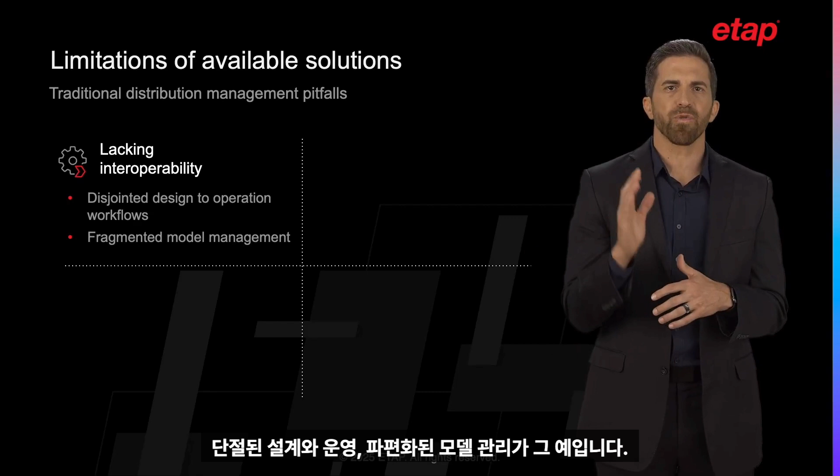As we assess the current ADMS landscape, it's clear that many systems suffer from critical integration challenges, from disjointed design to operation workflows to fragmented model management. These systems are very rudimentary, providing a SCADA, yes, with nice dashboards, but no real meaning. It may provide a high-level voltage optimization approach, but it lacks a connection to planning, and an outage management system that does not include an intelligent or accurate method to detect, isolate, and manage faults.

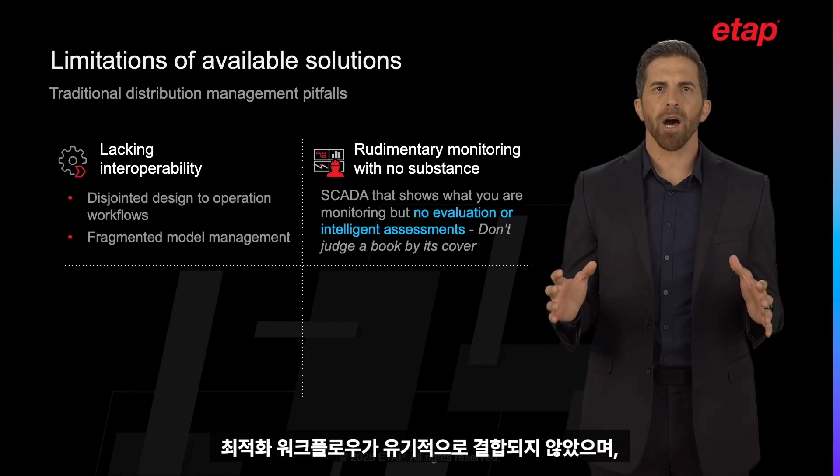The lack of a cohesive SCADA, network planning, protection, distribution management, and optimization workflow, coupled with the absence of microgrid digital twins, which usually requires a completely different product or solution set that has no knowledge of the rest of the distribution system, leaves operations vulnerable and limits the ability to fully optimize distributed resources.

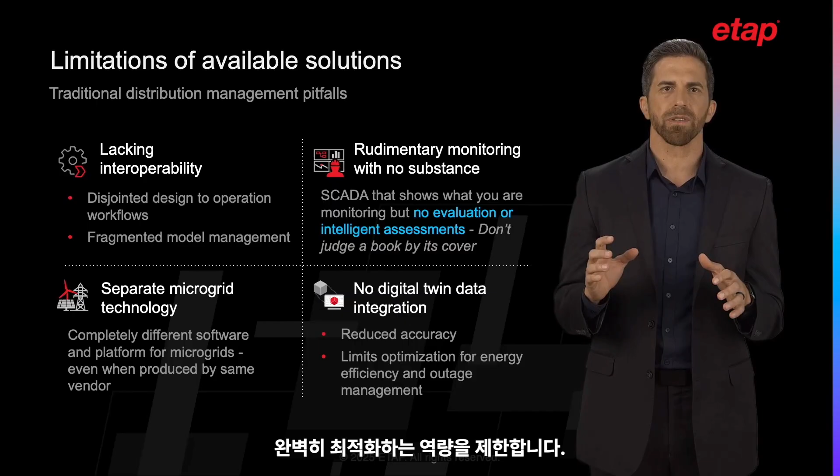Furthermore, there's the inadequate ability to simplify determining regulation compliance, no methods for working in a collaborative environment, and the inability to provide real-world training scenarios for a workforce currently experiencing a shortage in skilled resources. This exacerbates these issues, underscoring the need for a unified, forward-looking solution that can drive both operational resilience and strategic growth.

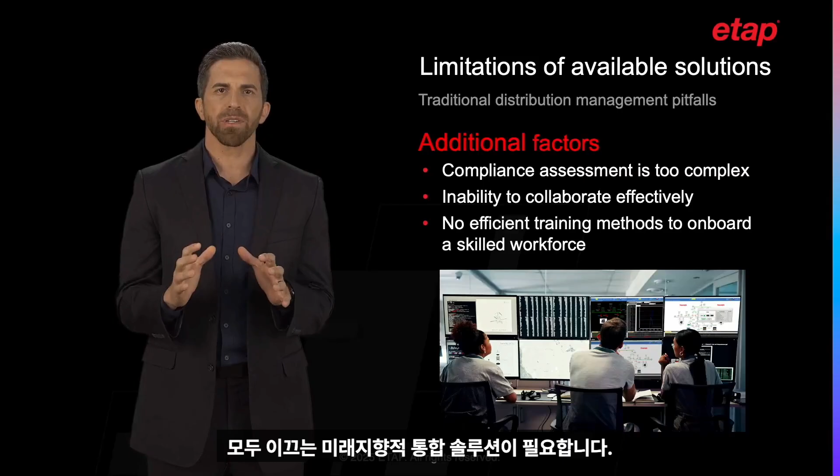ETAP stands apart by offering a truly integrated model-based solution that directly addresses the critical gaps in other ADMS platforms. We deliver a seamless flow from design to operation, ensuring that models are not only maintained, but also fully integrated across all aspects of operational planning. With ETAP, you gain a unified system that brings together protection, planning, operations, optimization, including safety and compliance regulations, all under one comprehensive platform and digital twin model.

This includes details within the feeder network, substations, and connected microgrids to provide the ability for engineers to perform system studies using operational data and for the operators to manage and optimize the system using system design knowledge. Our approach ensures that the entire network is accurately represented, managed, and optimized.

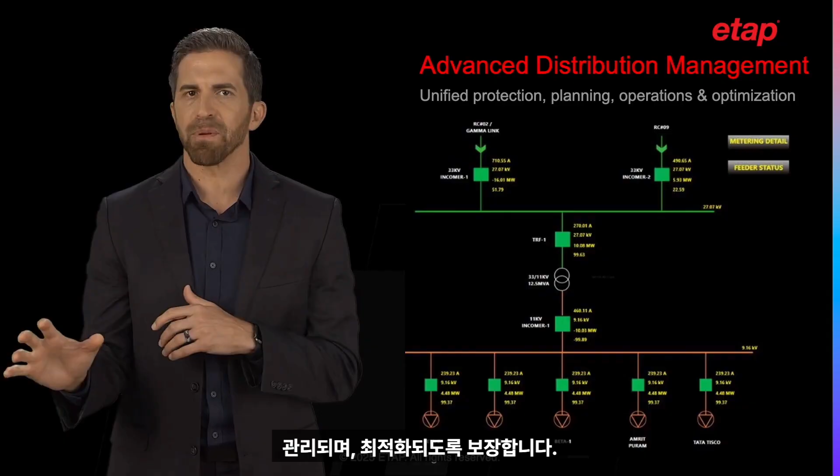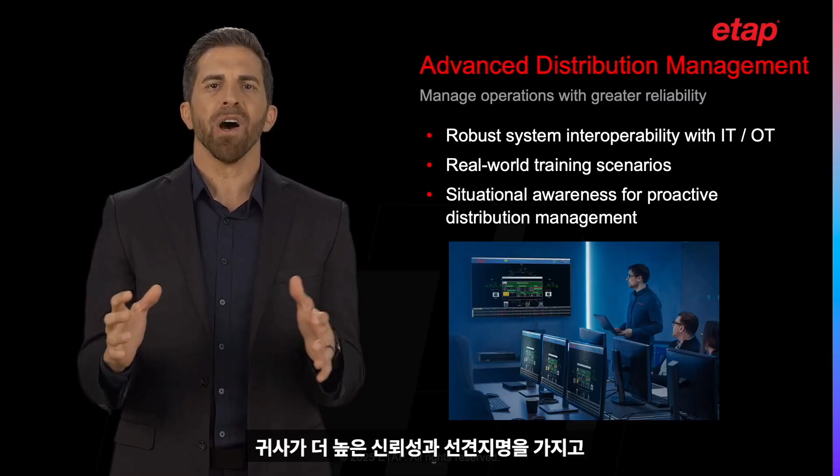We also provide robust support for system interoperability with the IT and OT network, real-world training scenarios to uplift new staff, and situational awareness, empowering your organization to proactively manage operations with greater reliability and foresight. In short, ETAP equips your operations with the advanced capabilities needed to overcome the limitations of traditional systems, driving both efficiency and strategic growth.

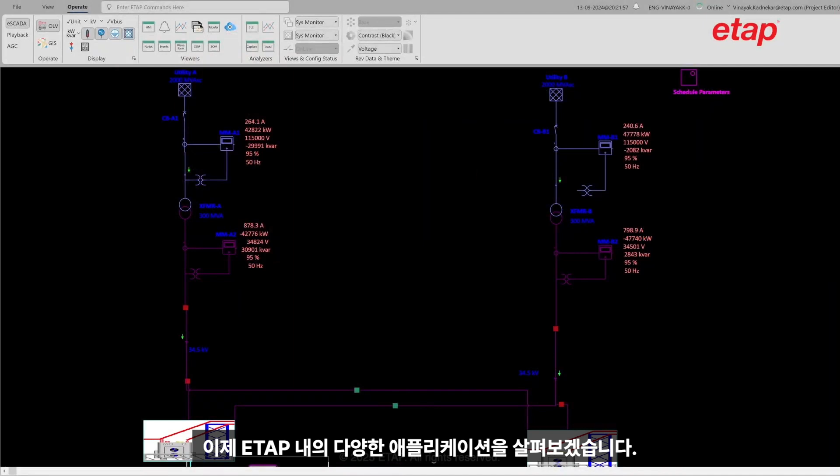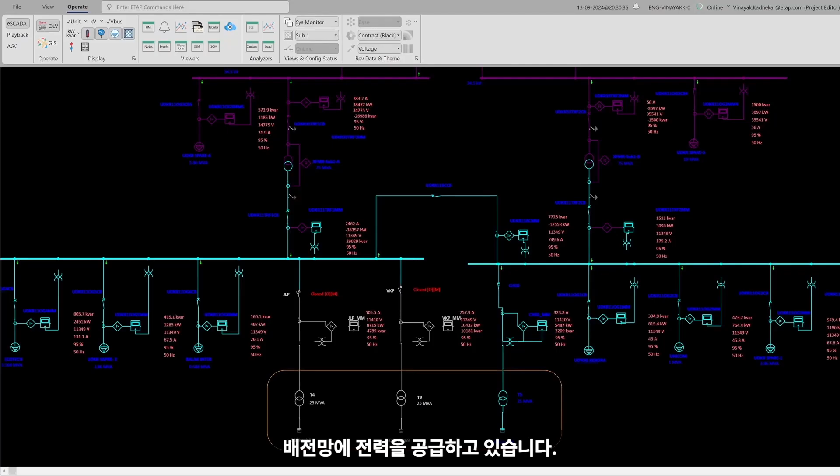Let's take a look into the different applications within ETAP. In this project, we have 115 kV, with transformers bringing it down to 34.5 kV into our distribution substation layer. We have modeled 2 substations, where power is further stepped down to 11 kV for our distribution network. We have 3 feeders, 1 de-energized and 2 energized, feeding into the distribution network. For the other substation, it's simpler, with just 2 feeders feeding into the network.

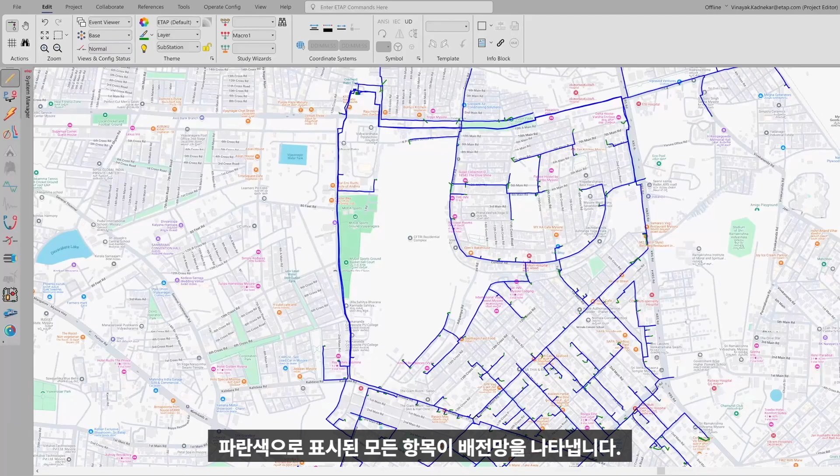Now let's move to our distribution view. Here, you can see our primary distribution network. Everything in blue represents the distribution network. Zooming in, you'll see our 2 substations with feeders extending. We've also modeled our secondary distribution network, including the distribution transformers and end customers, such as commercial and residential buildings.

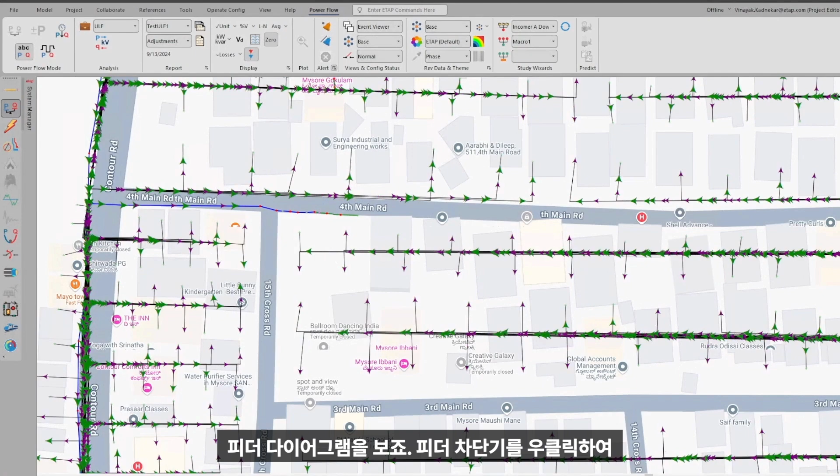Let's take a look at our feeder diagram. By right-clicking on a feeder breaker, we can dynamically create a feeder view. This orthogonal view provides a schematic feeder representation of the network. Various configurations, such as top-to-bottom or bottom-to-top views, can be set in the Rule-Book, offering flexibility in how you visualize your network.

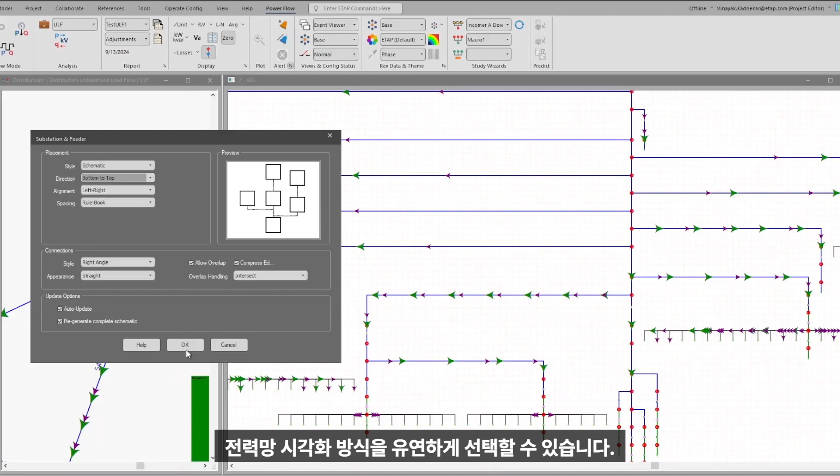Another important visualization is NetView. This view simplifies the network by stripping out unnecessary information, focusing on lines, protective devices, and status interconnections. It provides a powerful automatic way to visualize outages and network interconnectivity.

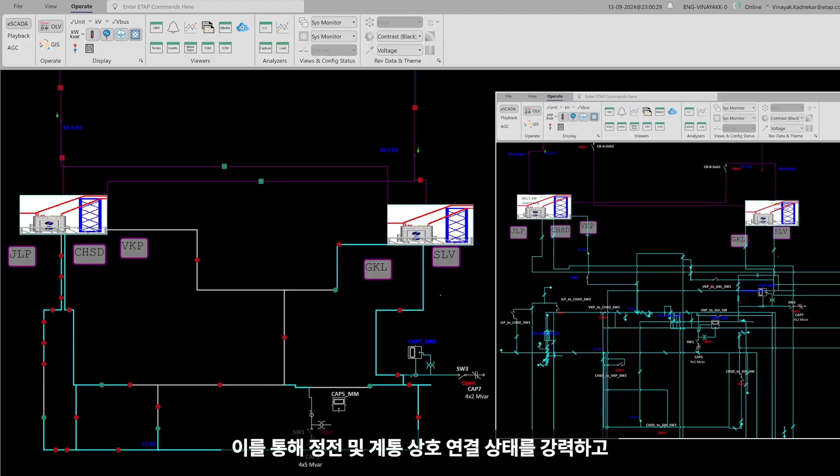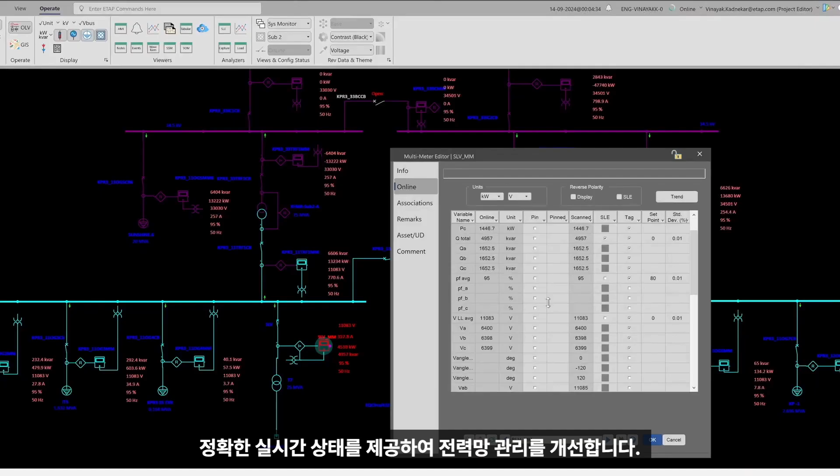Now, let's dive into the real-time portion. Here, I have my actual meter data and virtual metering calculations, showing real-time flows throughout the distribution network. Virtual metering significantly enhances grid management by providing operators with accurate, real-time insights into the electrical state of the system without relying solely on physical meters.

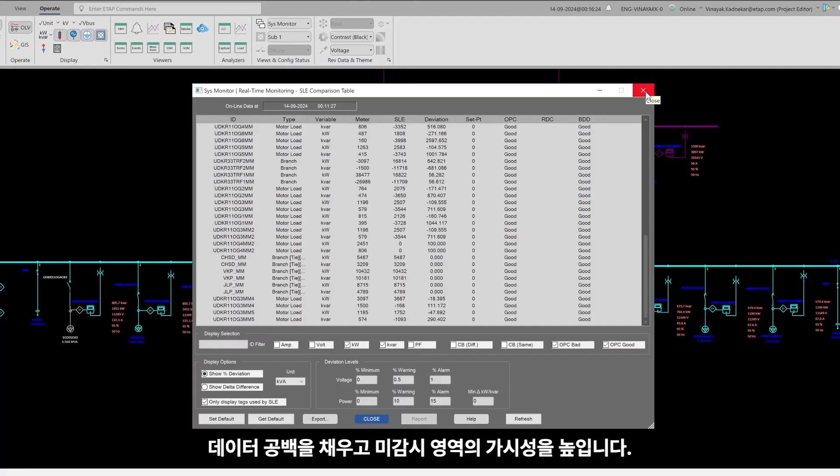Virtual metering is possible by leveraging the digital twin with advanced algorithms to estimate power flow, voltage levels, and load conditions across the grid, filling in data gaps, improving visibility into an otherwise unmonitored area. As a result, operators can make more informed decisions, optimize grid performance, and quickly respond to anomalies, leading to a more efficient, resilient, and reliable power system.

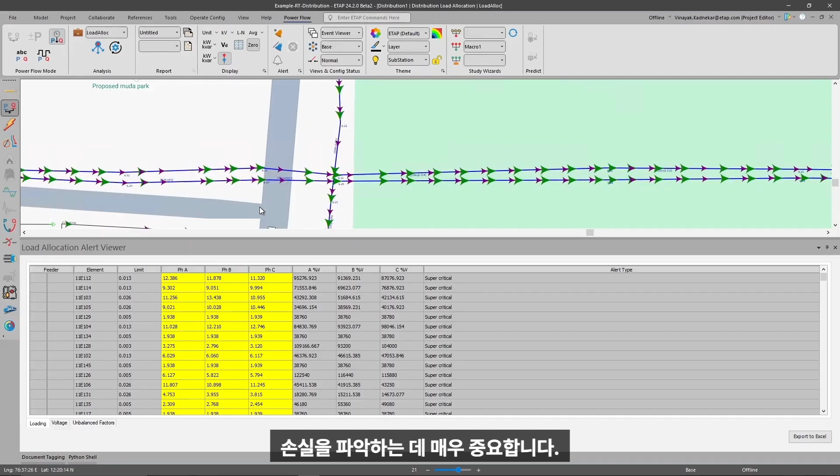Load allocation is also included, and this is crucial for understanding real-time flows and losses across the distribution network. We calculate losses, both due to heat and unaccounted for losses, which can indicate issues like theft. This data feeds into various study modules like unbalanced load flow, time domain load flow, enabling predictive simulations. You can perform what-if scenarios such as transferring loads between feeders to assess potential overloads.

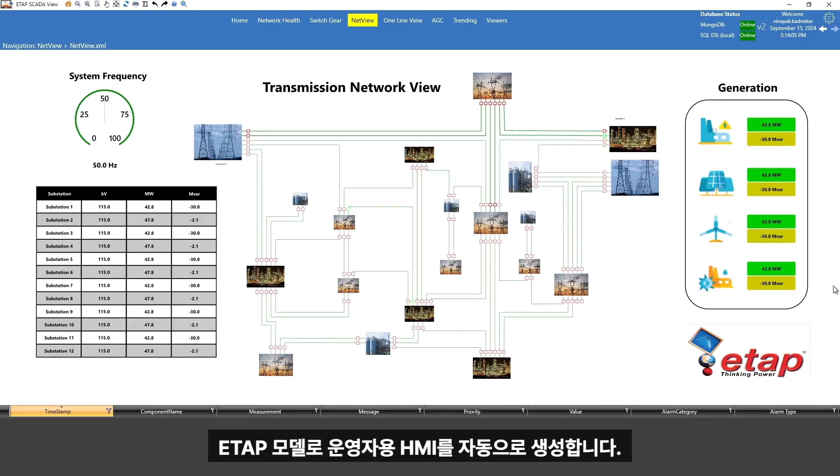Other analysis that can be performed within the same software using the single source of truth digital twin include short circuit, protection and coordination, arc flash for safety compliance, and power quality assessment. With the ETAP model, we can automatically create an HMI for operators. This model is used for analysis and planning and can be pushed out and viewed in our HMI viewer.

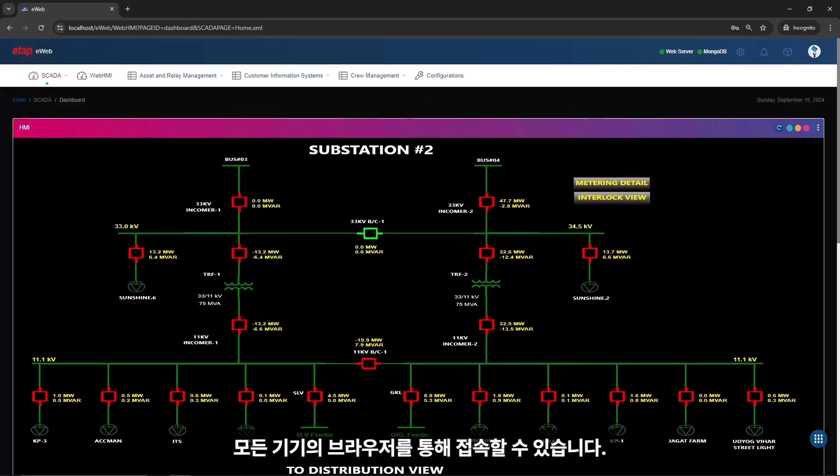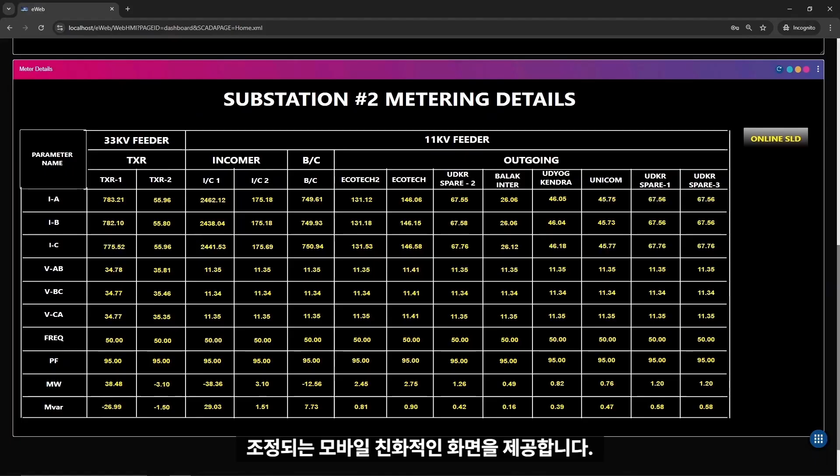eWeb is our web-based user interface, offering the same HMIs, but accessible via a browser on any device. eWeb requires no installation, providing mobile-friendly views that adjust to various form factors. We've significantly expanded eWeb to include advanced visualizations, such as substation panel views with real-time data and network views showing all interconnections. With the intelligence of the digital twin driving the graphics, the distribution network and substation visuals are automatically updated based on the status and operations of each device. This is without the typical manual manipulation of antiquated ADMS systems.

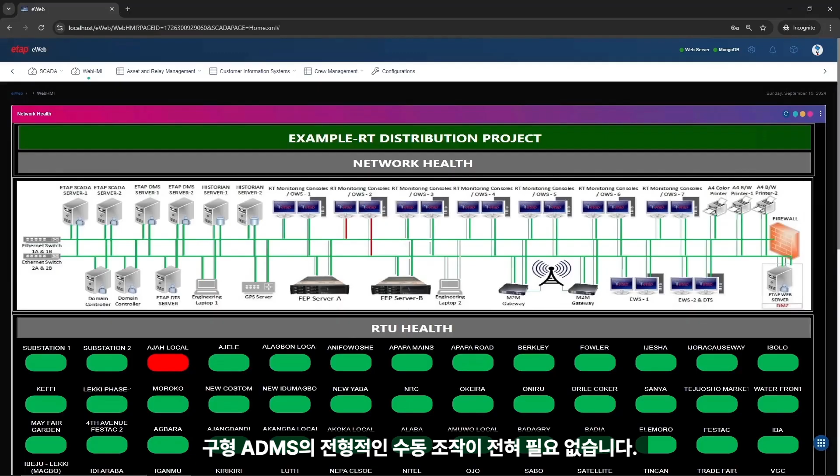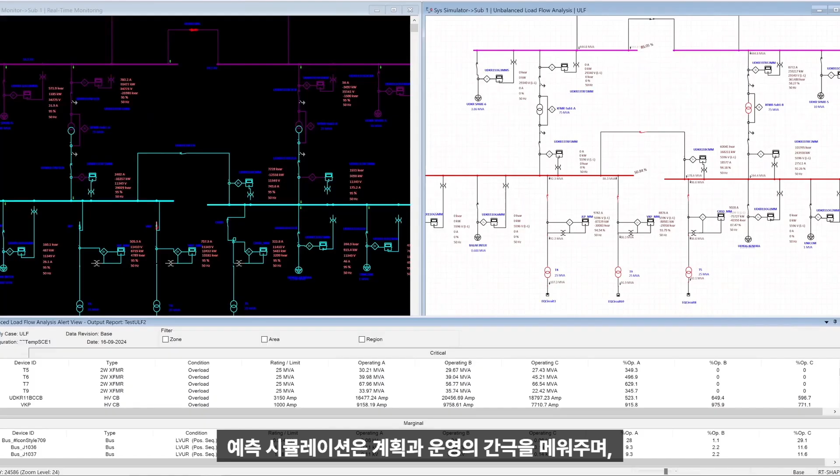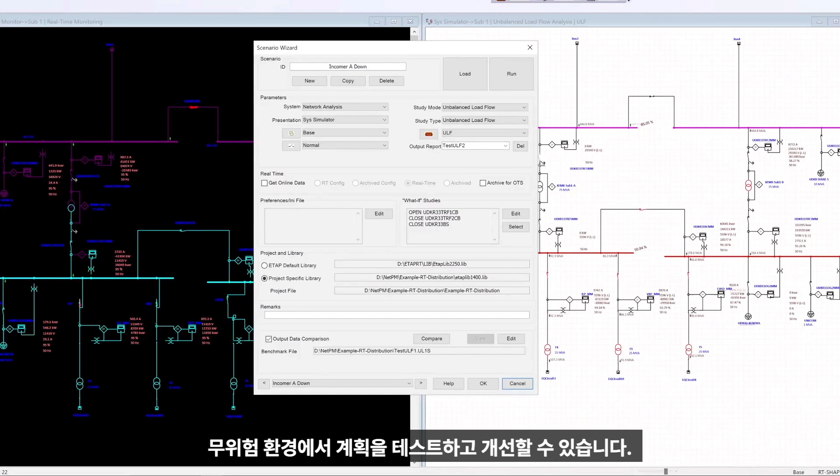The load allocation data feeds into our predictive simulation, allowing for continuous monitoring and analysis of the distribution system's performance. Predictive simulation is crucial for bridging the gap between planning and operations because it provides a dynamic and forward-looking approach to managing distribution systems. Predictive simulation allows operators and planners to visualize and analyze potential future scenarios before they happen. By simulating various operational conditions, including extreme events, it becomes possible to test and refine plans in a risk-free environment. This foresight enables better informed decisions that align with both current operations and long-term strategic goals.

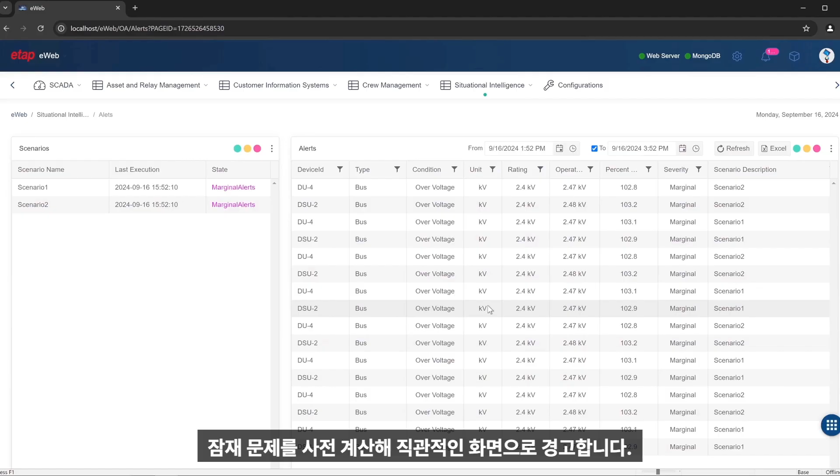Situational intelligence is enhanced through predictive simulation, periodically calculating potential issues before they arise and alerting you through a user-friendly interface. Traditional planning methods often rely on historical data, which can be limiting in the face of rapid changes in technology, demand, or environmental conditions. Situational intelligence, on the other hand, leverages real-time data and advanced modeling techniques to anticipate issues before they occur. This proactive approach helps in identifying potential bottlenecks, failures, or inefficiencies early, allowing for timely interventions that can prevent costly disruptions.

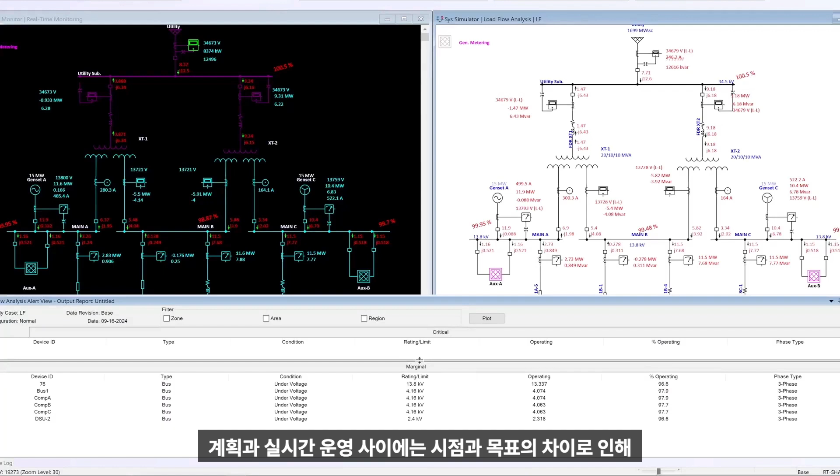There is often a disconnect between planning and real-time operations due to differing time horizons and objectives. Predictive simulation and situational awareness act as a bridge by integrating planning models with operational data. This ensures that operational decisions are made with a clear understanding of a long-term plan, and vice versa, that planning accounts for real-world operational constraints and variability.

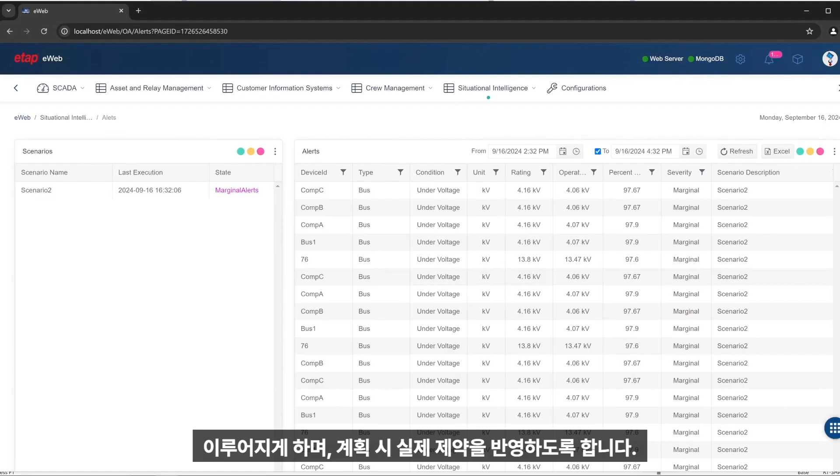Volt var optimization is one of the key objectives of distribution management. By optimizing the voltage and reactive power in our distribution networks, VVO allows us to maintain optimal voltage levels across the grid while minimizing power losses. By reducing voltage levels within regulatory limits using CVR, VVO helps in lowering energy consumption without compromising service quality. This directly translates into cost savings for both the utility and the end customers.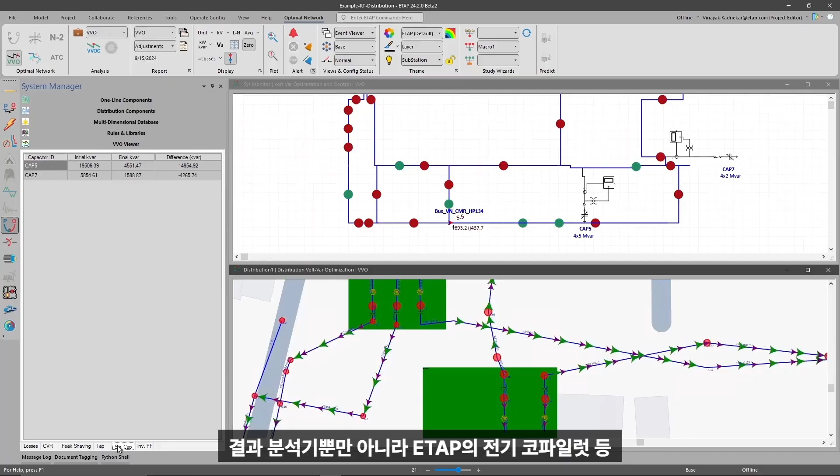We can dynamically manage reactive power, ensuring that the grid remains stable, even under varying load conditions. This is especially crucial as we integrate more renewables, which can introduce volatility. VVO can be assessed using result analyzers as well as AI, leveraging ETAP's Electric Copilot. Using common language search, VVO results are quickly assessed and documented.

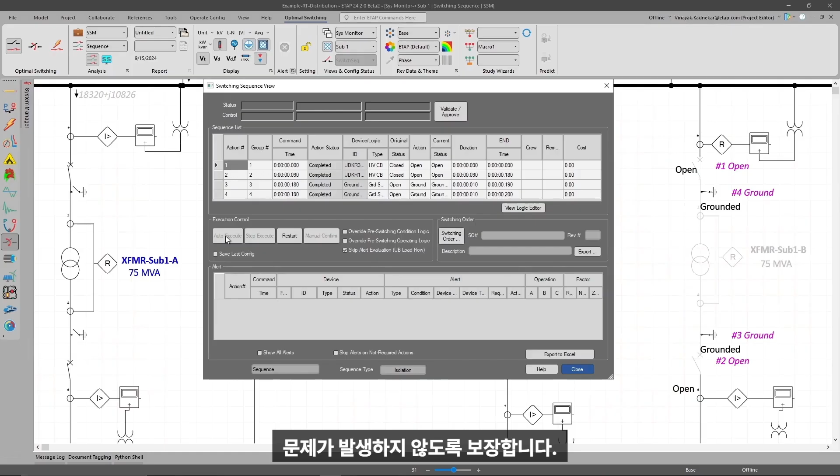Switching sequence management allows you to create, validate, and switch plans based on real-time data. For example, if you need to take a transformer out of commission, you can create and validate a switch plan to ensure it won't cause any issues. Switching optimization, feeder balancing, and loss optimization are critical components in modern grid management that work together to enhance the overall efficiency and reliability of power distribution.

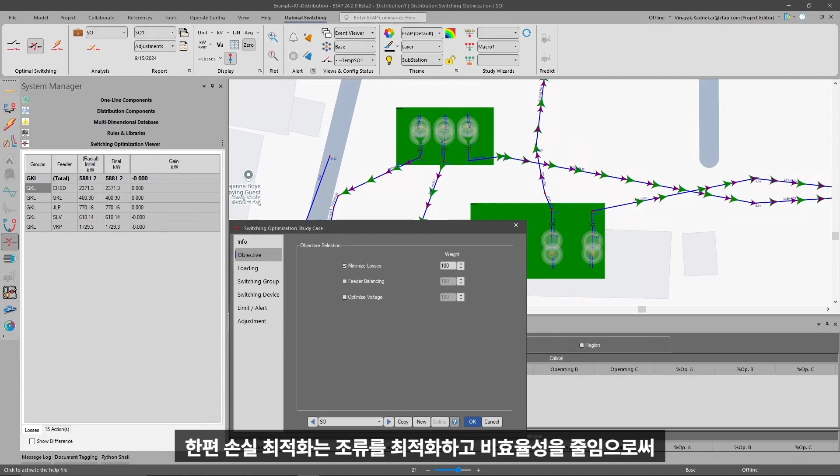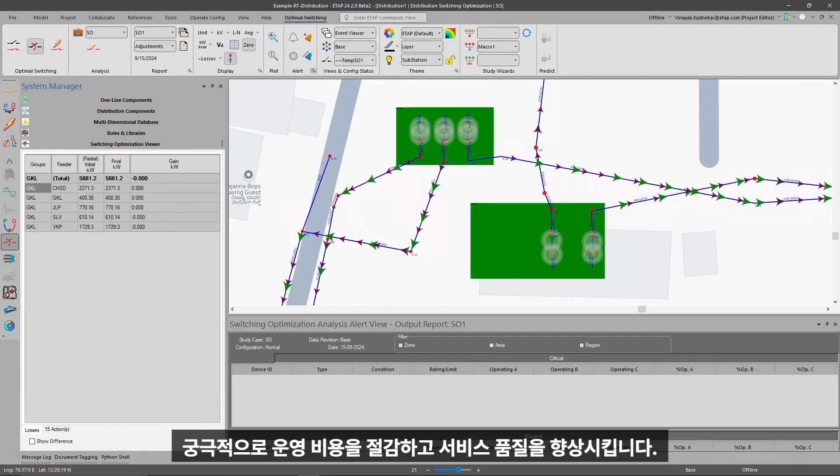Switching optimization allows operators to dynamically reconfigure the grid by selectively opening or closing switches, thereby improving load distribution and minimizing disruptions. Feeder balancing ensures that electrical loads are evenly distributed across all feeders, reducing stress on the infrastructure and preventing overloads. Meanwhile, loss optimization focuses on minimizing energy losses across the grid by optimizing the flow of electricity and reducing inefficiencies in power transmission and distribution. Together, these strategies not only improve operational efficiency, but also contribute to a more stable and sustainable power grid, ultimately reducing operational costs and enhancing service quality for end users.

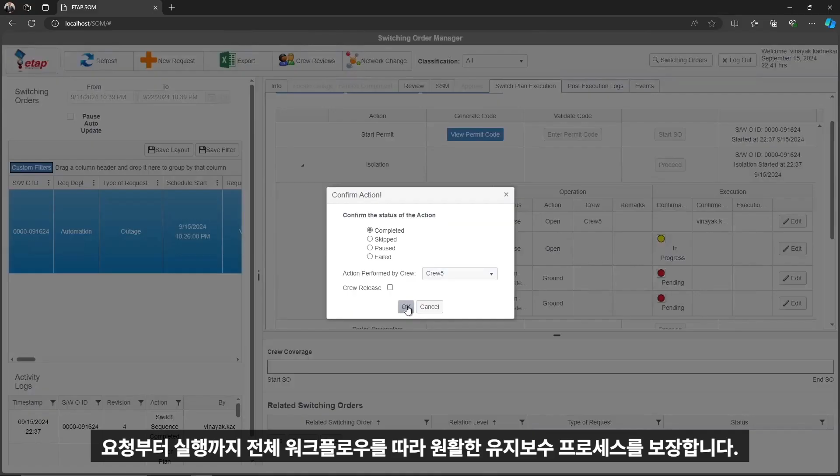These validated switch plans can be integrated into our switching order management solution, following a full workflow from request to execution, ensuring a seamless maintenance process. Our outage management solution integrates with the switching management to provide a comprehensive approach to handling outages and maintenance requests.

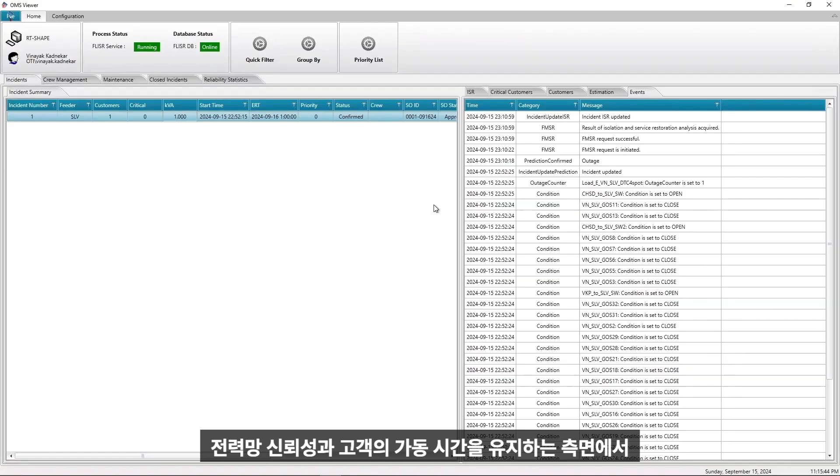When it comes to maintaining grid reliability and customer uptime, ETAP's fault location, isolation, and service restoration, and optimized fault management service restoration go beyond the basics. Our FLISR solution is designed to do more than just restore power quickly.

With optimized FMSR, you have the power to tailor your approach to reliability. By integrating selectable objectives, ETAP ensures that your specific goals, whether it's maximizing uptime, reducing operational costs, or enhancing overall efficiencies, are met. This isn't just about keeping the lights on. It's about doing so in the smartest way possible. ETAP's solution optimizes every aspect of fault management, balancing cost and efficiency with your reliability targets.

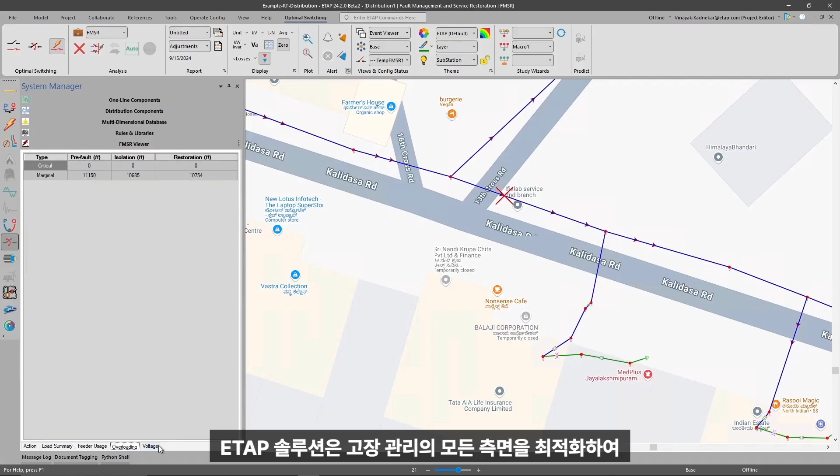We offer extensive reporting capabilities, including operation shift reports that automatically generate at the end of each shift, and alarm reason reports that link events like circuit breaker trips to associated faults for detailed analysis.

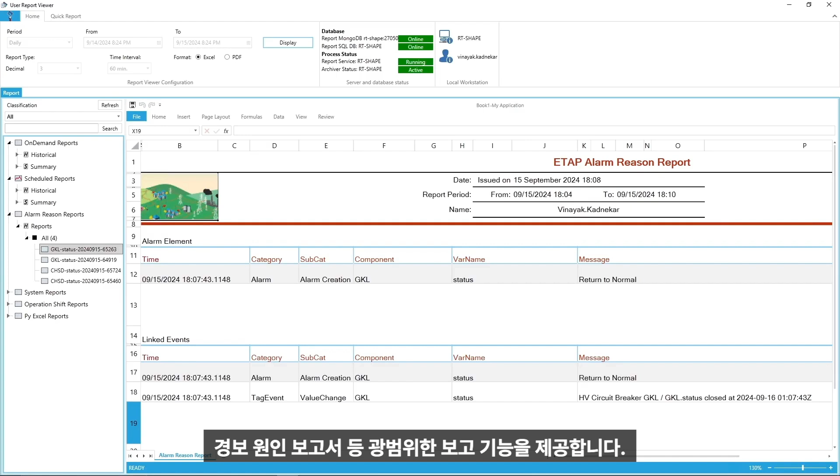ETAP's Operator Training Simulator is a cutting-edge real-time training solution designed to immerse operators in lifelike scenarios with full system response. Think software in a loop. With OTS, operators can safely experience the full spectrum of grid operations, from normal conditions to extreme emergencies, without the risk of real-world consequences.

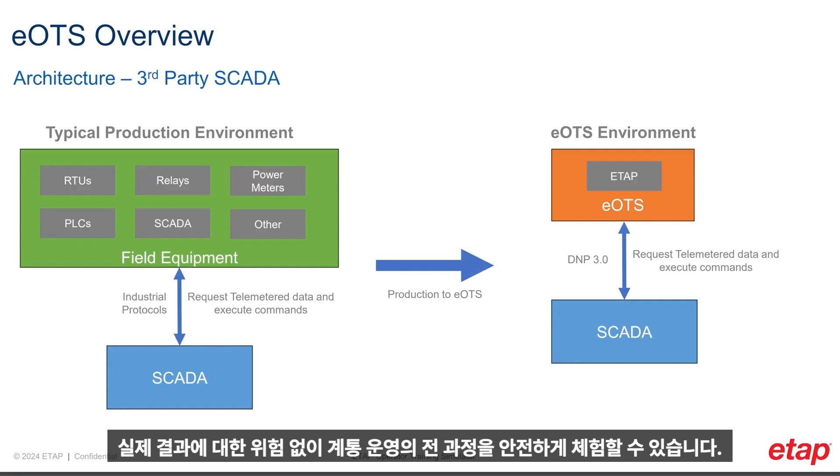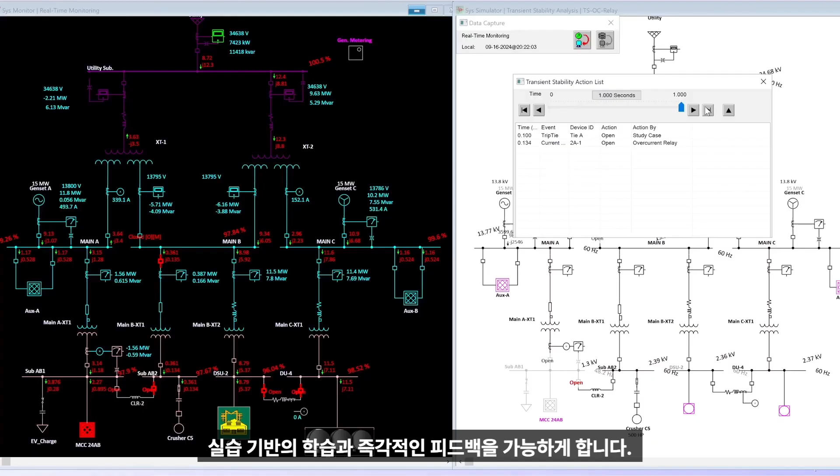OTS integrates with ETAP's comprehensive platform, providing operators with access to a wide array of features, including real-time simulation, where you can simulate and interact with your actual system in real time, allowing for a hands-on learning and immediate feedback approach. Scenario-based training is tailored to reflect real-world challenges, helping operators master complex procedures and decision-making skills.

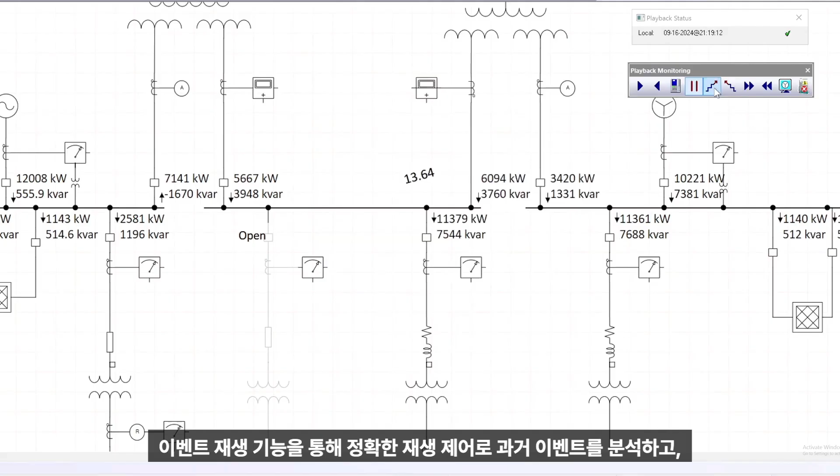With event playback, we can analyze past events with precise playback controls to understand operator responses and identify areas for improvement. Within a multi-user environment, we can collaborate with team members in a shared, synchronized environment to enhance teamwork and communication.

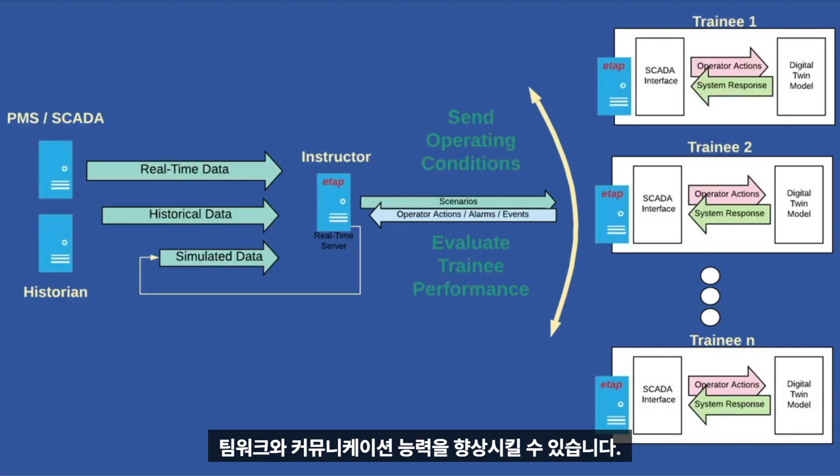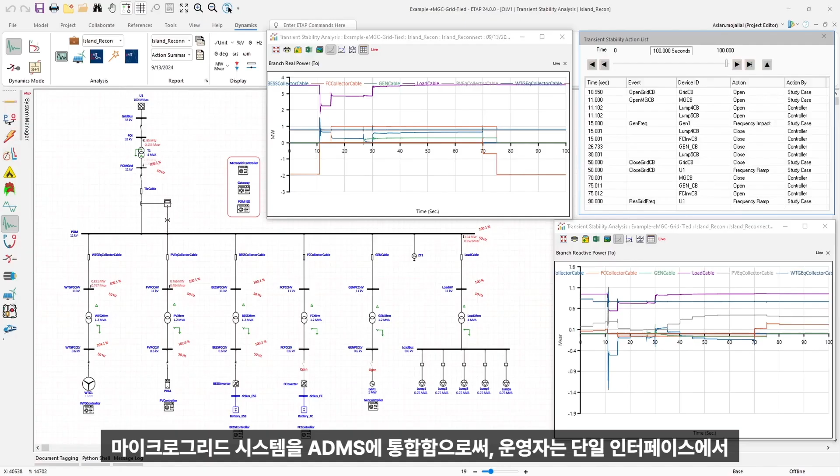As the complexity of modern power grids increases, the role of operators in maintaining grid stability and resilience has never been more critical. ETAP's integrated environment, combined with its advanced microgrid capabilities, empowers operators by bridging these solutions directly into the forefront of ADMS. By integrating microgrid systems into the ADMS, operators can seamlessly manage both centralized and decentralized resources from a single interface. This unified control enhances situational awareness, enabling operators to make more informed decisions and respond swiftly to grid events.

With ETAP's microgrid controller integrated into ADMS, operators can automate complex processes of controlling energy resources and optimize the dispatching of the assets. This level of automation not only reduces operational costs and overhead, but also minimizes human error, leading to improved overall grid efficiency. In the event of grid disturbances, ETAP's integrated microgrid solution allows operators to quickly isolate and stabilize affected areas. This enhances the resilience of the grid, ensuring continuity of service even under challenging conditions.

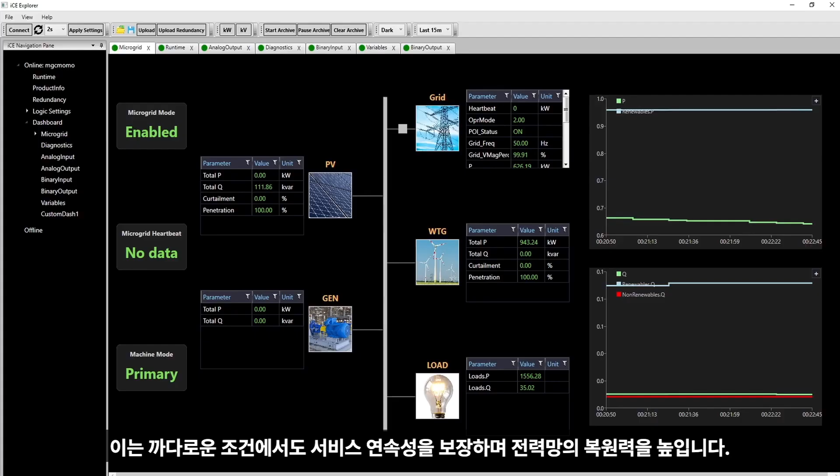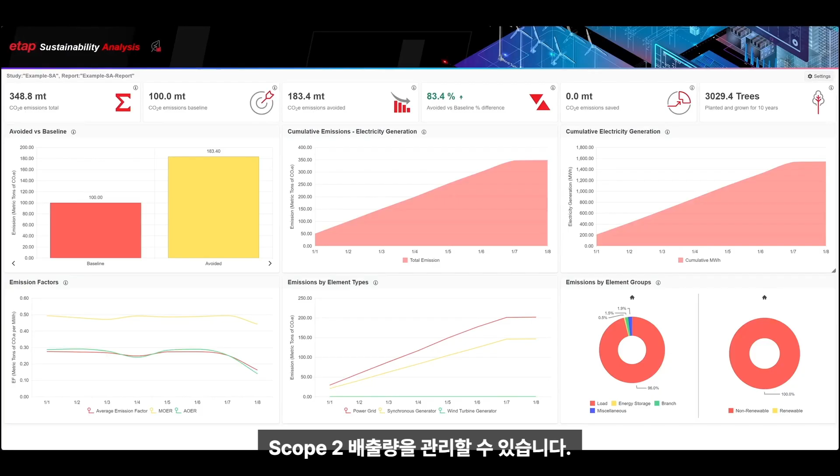Using historical or forecasted data, we can manage our Scope 2 emissions with a sustainability analysis dashboard to track carbon emission KPIs. This dashboard is used for monitoring current emission outputs and to predict the impact of future energy efficiency initiatives. From within the same solution, you can view emissions compared to goals, the success of your initiatives, and emission output per device or device type. All this without moving to a completely different ESG reporting tool.

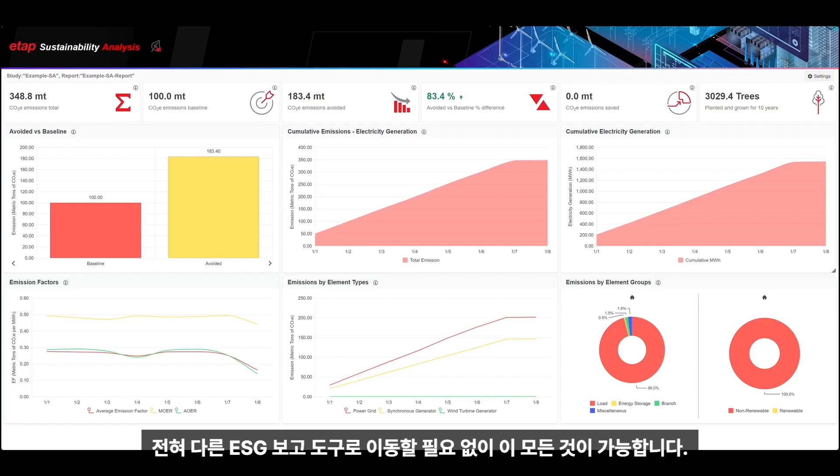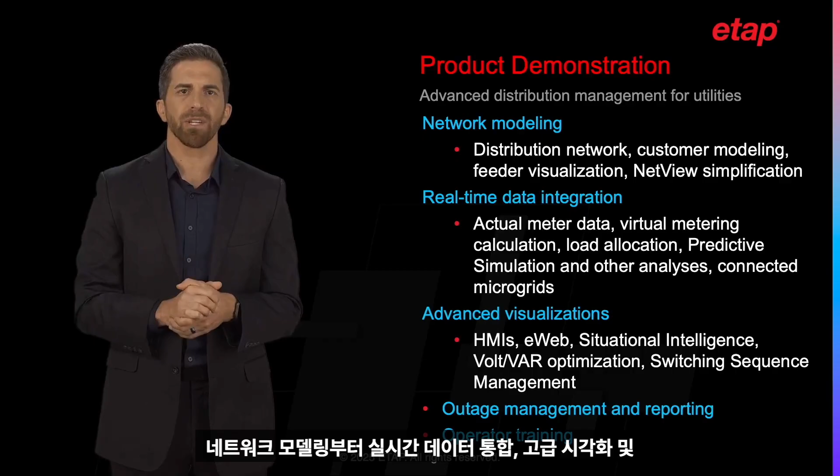This concludes our high-level overview of ETAP capabilities. We've touched on everything from network modeling, real-time data integration, to advanced visualizations and outage management. Now, tangible key customer benefits. Let's talk about our cost savings. ETAP optimizes how electricity is distributed across the grid. By ensuring that energy is used more efficiently, customers see a direct reduction in their monthly bills. This isn't just about minor adjustments. It's about meaningful savings that add up over time.

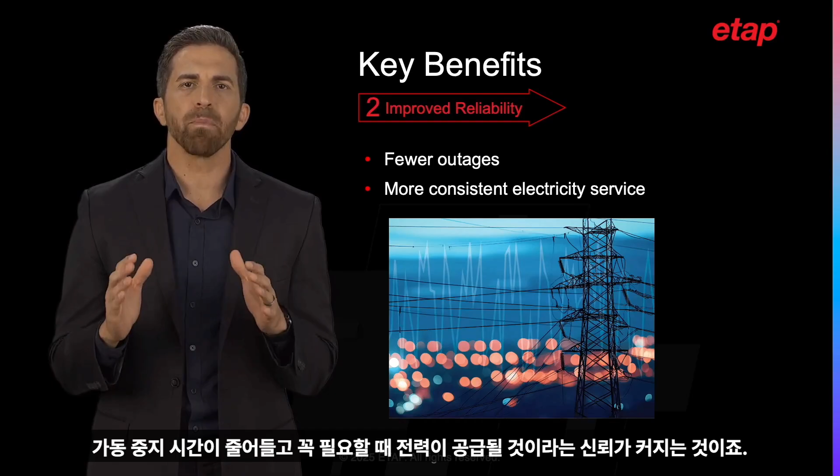ETAP transformed Noida Power's traditional utility to a smart utility, realizing over $21 million in savings over 6 years, including $9 million in savings of asset integrity and reliability. Speaking of reliability, with our advanced grid management capabilities, customers experience fewer outages and a more consistent electricity service. This means less downtime and more confidence that the power will be there when it's needed most.

We also play a crucial role in supporting sustainability goals for smart cities. Our system is designed to improve energy efficiency and facilitate the integration of renewable energy sources. This allows customers to reduce their carbon footprint, contributing to a greener and more sustainable future. Cities of the future will soon account for 90% of the world's population growth and 75% of its energy consumption. The pressure on critical resources will increase.

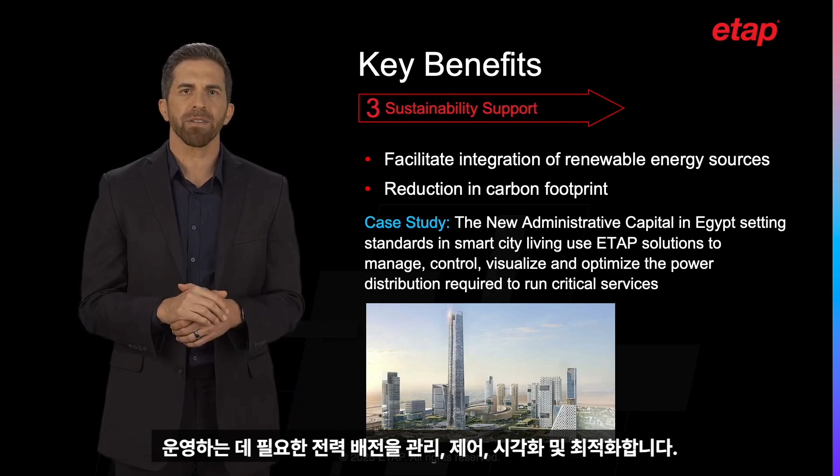The new administrative capital in Egypt launched one of the country's most ambitious development projects to date, setting standards in smart city living using ETAP. ETAP manages, controls, visualizes, and optimizes the power distribution required to run critical smart services for city operators, citizens, workers, and visitors alike. Included with smart cities is proactive problem resolution. Our technology detects potential issues before they become problems for our customers. By addressing these challenges in advance, we ensure that service remains uninterrupted, providing peace of mind and continuous power.

Finally, our system helps in extending the lifespan of critical infrastructure. By reducing strain on the grid and optimizing operations, we minimize wear and tear on the equipment that our customers rely on. This leads to fewer disruptions and ensures that the systems in place last longer, reducing the need for costly replacements and maintenance.

In summary, our ADMS delivers tangible benefits: lower energy costs, improved reliability, stronger support for sustainability, proactive problem solving, and longer-lasting infrastructure. These advantages make a significant difference in the daily lives of our customers and align with our commitment to providing a superior, more sustainable energy experience.